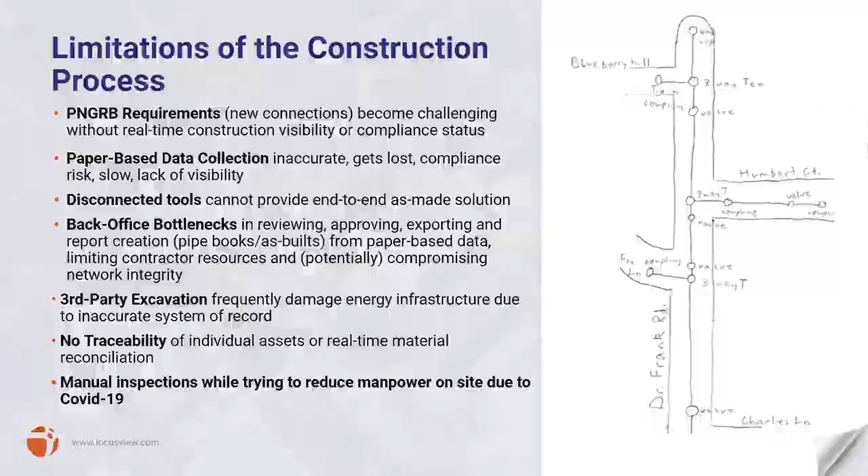The amount of data being collected and captured in the field is huge. You can see how much data we were able to collect on the BPCL project in a few months - it's crazy, talking about tens of thousands of assets and forms. And if you look at COVID and where we are today, we want to limit manpower on site and make sure data is captured automatically in digital format. This is a big driver to use the technology.

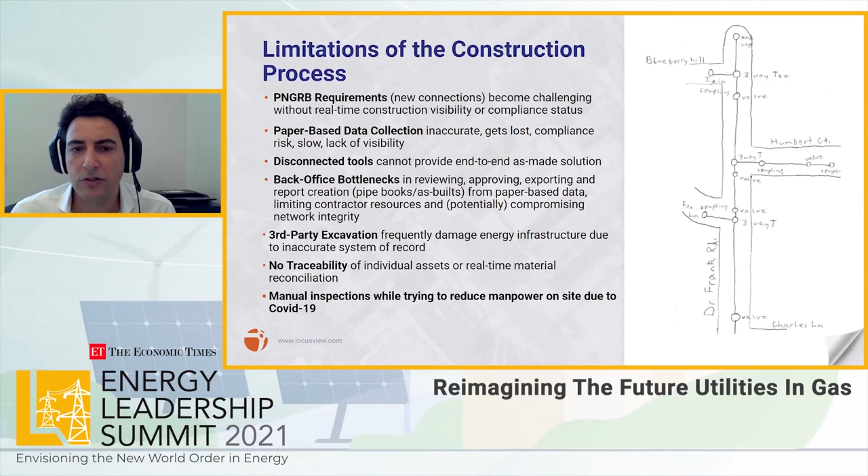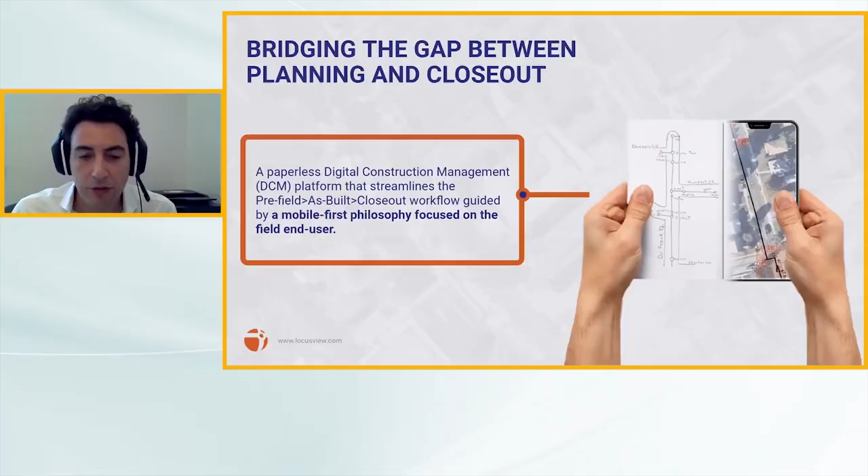So what is Locusview all about? Locusview focuses on construction of linear assets such as gas pipelines, CGD, and electric grids. It's a complete end-to-end digital construction platform that streamlines the entire process, from the pre-field planning phase - bill of material, permits, design, drawings - to actual execution in the field, the as-built, with the ability to collect all data by the field crews themselves during construction without needing third parties like surveyors, and the closeout, generating reports, pipe books, and so on.

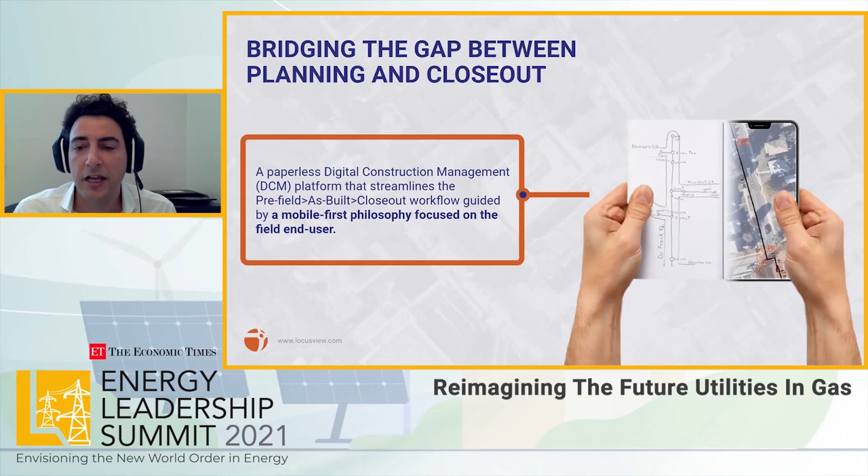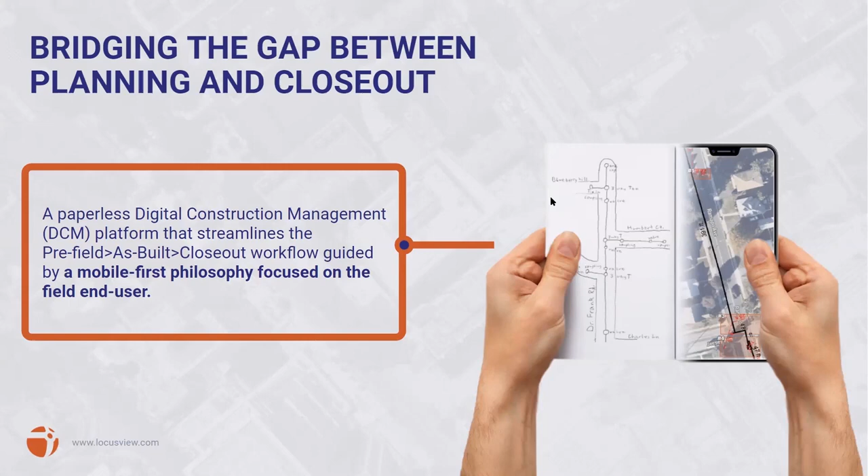The main focus of the technology is on the mobile platform, the field crew themselves, because if the technology is not easy to use, it will be useless. We see many vendors who tried complicated tools designed for back office users and not field crews, and that's why they fail. We are doing everything we can to make the mobile piece as easy as possible so field crews can collect this data on their own after minimal training.

What are the key benefits we're seeing in the market? Based on thousands of field crews using the data, we're seeing a 70% reduction in project cycle time and 20% reduction in rework. The data gets to the office in real time and is validated in real time. If there is missing data, we know about it and can fix it while the trench is still open, when the field crews are still out there.

We're seeing at least 50% reduction in surveying cost, because the field crews themselves can collect survey-level data on their own. Some companies remove the need for third-party surveying services entirely, with the whole process done by the field crews themselves.

And of course, visibility and compliance. Our main goal is to provide real-time construction visibility, giving information about material, joints, welds - everything for traceability - as well as ensuring the process was done according to procedures and regulation. This data is collected all at once, which is why we can create this visibility and validation around data quality.

So how does the system work? We have three main pillars. First is the pre-field phase, where we automatically create an electronic job package. The job package includes the work order, bill of material, existing GIS information, permits, and any data required for the field crew to do their job.

Then we have the field, which is the heart of the system - our mobile platform's main focus. It provides a solution for field crews to collect all data required during construction, including as-built data with high accuracy GPS at sub-foot accuracy, material traceability, personnel qualification, checklist inspections, pressure tests, and so on. This entire data is visible to back office users in real time. If data is missing, we see it in real time, get notifications, and can connect with the contractor to fix it. We have more capabilities being built, which is something we learned a lot about with BPCL.

What is the level of reports and pipe book and so on that you want to have as part of the process? This is something we generate automatically by the system, whether it's the pipe book or dashboard, in order to monitor the progress. Once the project is done and approved, we generate all the reports automatically.

The data will be exported to the GIS system, Esri, Smallworld, and so on. It can also be exported for asset management and other systems.

We believe that in order for a solution like this to be successful, it needs to be a turnkey solution. When something goes wrong in the field, whether it's a software problem, a hardware problem, or a connectivity issue, we want to make sure we have one vendor, one phone call to take in order to get it solved.

This is why we provide this type of turnkey solution, which includes three main elements: hardware, the actual field kit used by the field crews, GPS, ruggedized barcode scanner, tablet, and so on; the software, both mobile and web; and all the managed services, which are actually the glue that connects the hardware and the software in this entire system.

It's the ability to provide high accuracy GPS, network connectivity, RTK, and cloud hosting. We have local service in Mumbai, AWS, so it's all ready to meet the requirements in terms of the location of services and so on. And we have 24/7 local help desk, if there is anything that comes up.

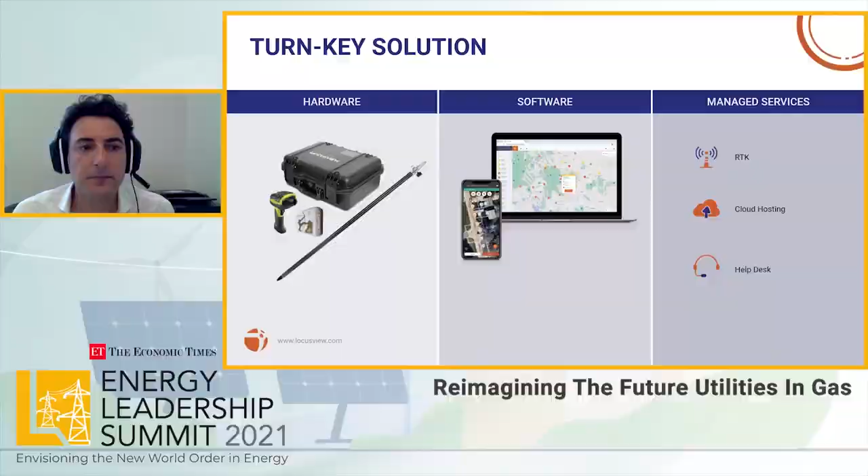Just a few words, and I won't take too much of Mr. Dash's presentation or BPCL's. As I said, we were honored to work with BPCL on this project. We were able to provide them, under lease terms, this entire solution of hardware, software, and managed services. The application was fully customized to meet BPCL's needs.

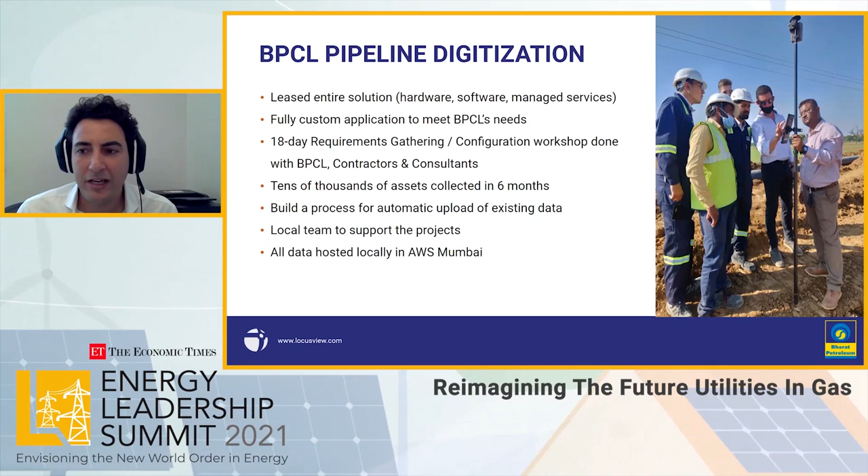As I said, this was the first time we had a production deployment in India, and we worked very closely with BPCL to understand how to fine-tune and customize our application to meet their exact needs. We had a requirement gathering process and workshops with BPCL, their contractors, and their consultants, really bringing everyone we needed around the table, to make sure the application BPCL would get and deploy would meet their exact needs.

We're talking about pretty massive data already collected in the system. Tens of thousands of assets were collected and validated in real time over about a six-month process.

Another thing unique to BPCL: there was a lot of existing data already captured manually in the field prior to Locusview, and we built a specific, unique process for BPCL to be able to upload that existing data too, so that at the end of the day, when they view this entire cross-country pipeline project, they get all the data in one place.

And of course, all the data is available for BPCL and hosted locally in Mumbai. So Mr. Dash, I would like to thank you for your confidence in us. It was an honor to work with you on this project, and I'm looking forward to continuing to work with you. That's it, this concludes my presentation.

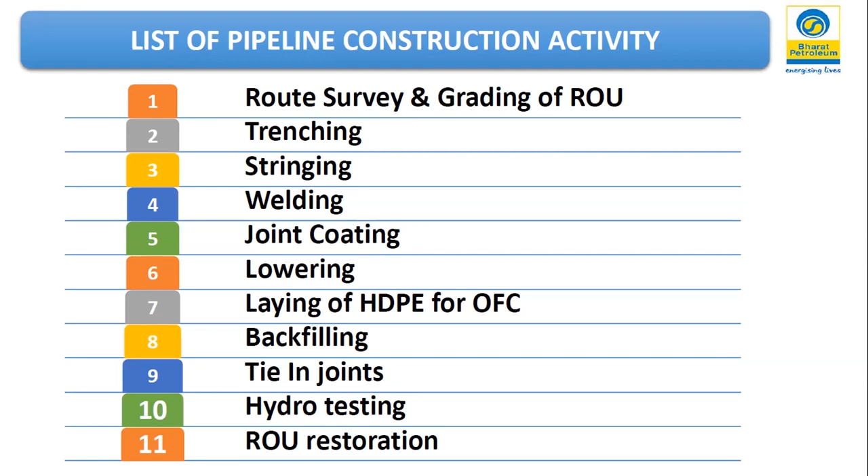After laying the entire pipeline, when all the links and sections are joined, we do hydro testing to check the integrity of the pipeline. Since the pipeline mostly passes through agricultural land taken from villagers or farmers, that land needs to be restored to its original state. This is called ROU restoration, and handing over the land to the land users or villagers. These are the major steps involved in pipeline construction activity.

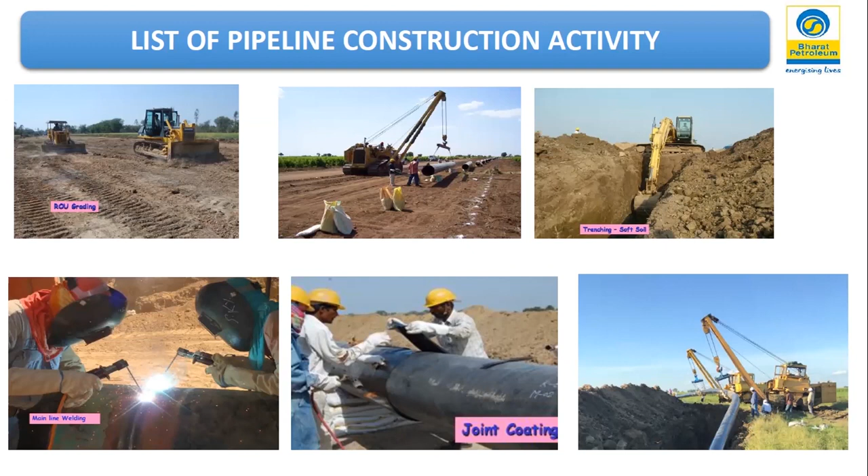These are a few photographs which generally depict the pipeline process - right from ROU grading, then stringing, trenching, pipeline welding, then each welding joint is separately coated, which we call field joint coating. Then the pipeline is buried into the trench, which we call lowering. Now all these processes need to be checked and thoroughly approved by the consultant we engage, and some processes are also cross-checked by our own engineers.

So basically for a project, we generate different reports. When the pipeline is handed over to the pipeline laying contractor, we call it a pipe handover report. Then they string the pipeline, and we generate another report called the stringing report, and trenching report. Once trenching is done, the pipeline welding report is the most important report.

Then each welding joint is coated, which we call a coating report. Then the pipeline is buried into the ground, which we call a lowering report. Finally, a pipe book is made, which gives the summary of all the reports. Currently, all these reports are manual, hardbound, handwritten reports, and they run into volumes.

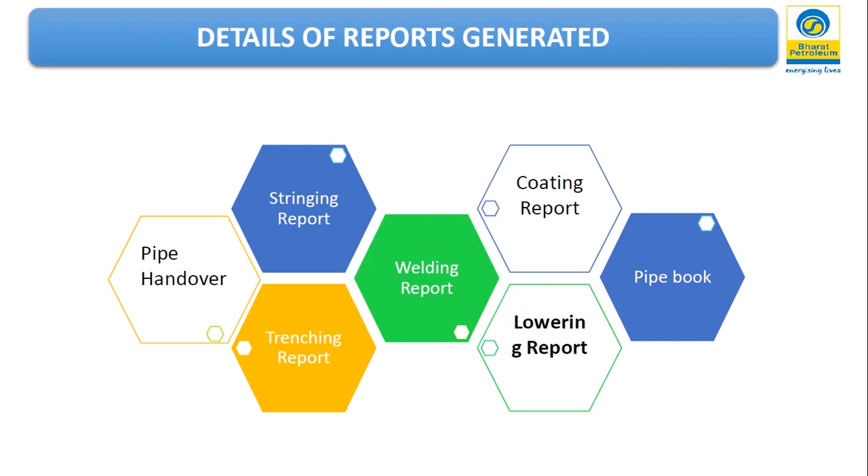Now the technology we wanted from Locusview - we tried to give our expectations of what we want from them. Each pipeline length is 12 meters. We wanted them to give us a format, a platform or an application that would capture at minimum all this data - like the pipe details should be available, giving a pipe number.

Every pipe, which we call an asset, has got a unique number. Then every coating done gets a coating number. Then from which steel heat the pipe is made of, it also contains a number. Then what is the pipeline thickness, and of course what is the grade of the pipeline.

Then comes the stringing and trenching report. We want trench depth, what is the width of the trench, and the length of course.

Then comes the welding report - welding joint number, what is that joint number actually, to trace in future in case we want to carry out some maintenance. Then what is the chainage of that welding joint. Then welding details - which are all the qualified welders who really welded the joint, because one single joint is completed by 6 welders, for the various runs. Then all the welders need to be mapped to each welding joint, showing who carried out the welding.

Then we carry out radiography, an X-ray of the joint, which shows the quality of the weld and its longevity or life. Then comes lowering - what is the chainage, pre and post padding involved. Suppose there is a rocky terrain, we need to go for pre-padding with soft material, and above the pipe also we go for soft padding.

Then there's the pipe cover, which is a mandatory requirement as per the statutory bodies. It is being monitored and later physically checked by the statutory body, which gives clearance for operating the pipe. So it is quite vital.

Then after every kilometer or at every crossing, we do a tie-in joint. The tie-in joint should have the joint number, length, and chainage of the joint, and the welding number, welding joint number, chainage, and welder details, and the radiography result - acceptable, not acceptable, or what defect is in the radiography. All this needs to be elaborated in the report.

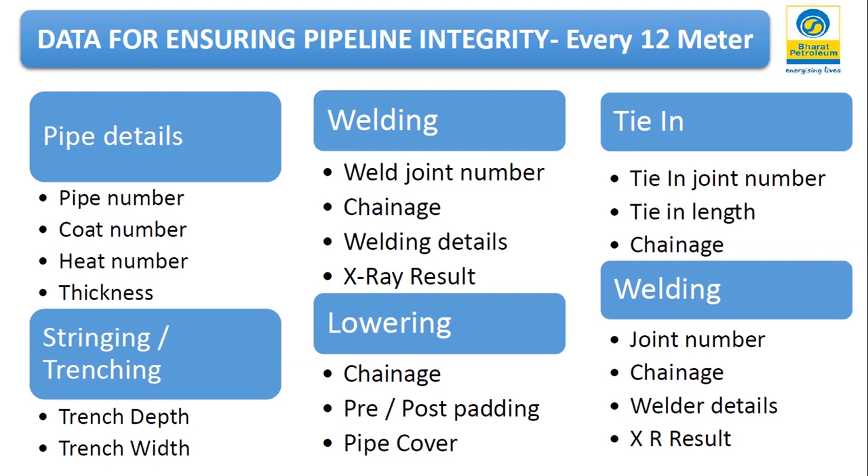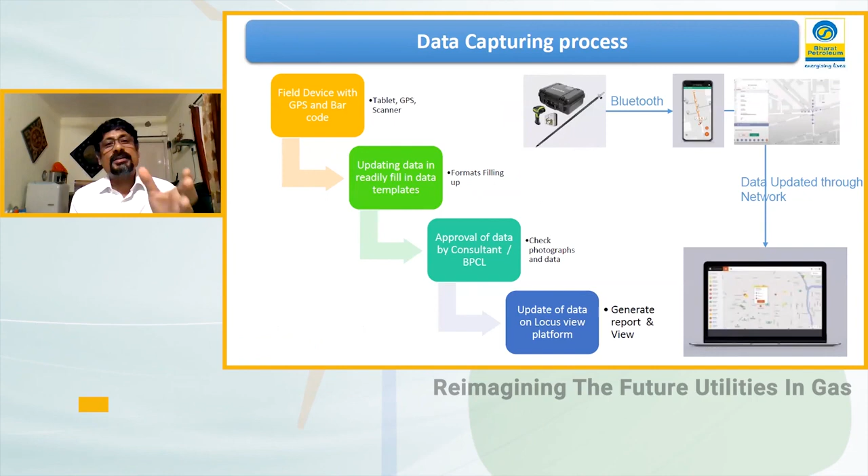And as already explained by Mr. Shahar about the field instrument, which provides us a handheld GPS, a barcode scanner, and a tablet - the solution is capable of collecting all the reports in the field right away.

And each and every report is date and time stamped. You can locate where the report has been prepared, whether in the pipeline, near the pipeline in the field, or in the back office of the contractor or consultant.

That is very vital compared to the previous manual system. We have been observing that the reports are delayed and bunched up. They are not made every day - they get bunched up, and after a week or 3-4 days they start preparing the report. This generally defeats the very purpose of making a report.

Then updating - each report has this benefit, one of the major benefits which I am going to talk about in my next slide. It captures the GPS coordinate of each and every weld joint, each and every pipe.

Then for this data, they have prepared a pre-filled format in which you only have to give the minimum data that needs to be filled up. This is done very easily, and all the pipeline laying contractors are trained in this and able to complete this data with minimum effort.

And this data, after completion, goes for approval by the consultant or by BPCL. Once the data is approved, there's also a provision to attach a photograph of that location showing what is happening there, along with the report.

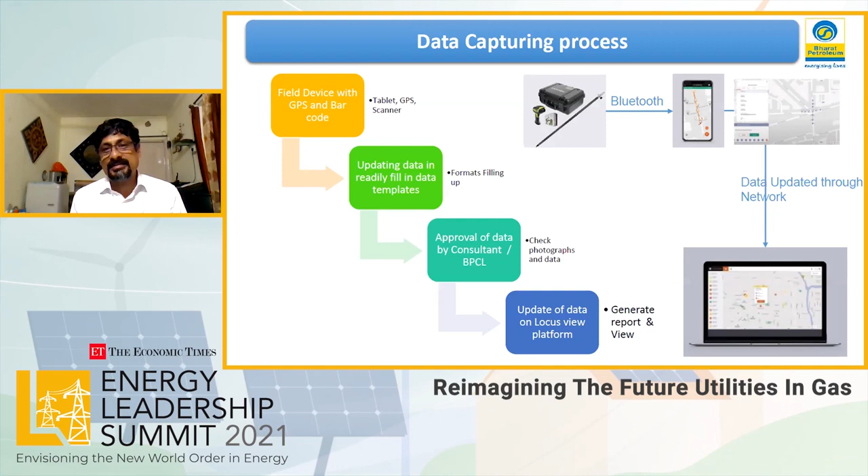So finally, once the data is approved, it gets uploaded to the server and populated, and the person sitting at the back office can see what is happening in the field. This is, in a nutshell, the basic process involved in this data collection.

Now coming to the benefits - the difference between the earlier manual process and the current digital process. In the manual process, for each and every report, all the pipe numbers, heat numbers, and coating numbers had to be written repeatedly, which consumed a lot of time.

In the current scenario, this data is pre-filled only. And since we have a barcode scanner, by scanning the pipe which has a barcode, this data gets automatically transferred to the server or to the tablet. This is really accurate - if somebody enters data manually, there's a likely chance of mistakes happening, but this captured data is errorless.

Then, GPS coordinates used to be entered manually - somebody had to go with the DGPS to note the coordinate, northing and easting, and note it down. Doing this manually, wrong data may get captured.

Now, with the high accuracy GPS, the coordinates are transferred seamlessly to the tablet. That is a major benefit and advantage, because locating an asset more accurately at a later date while carrying out maintenance is very important. This is a very valid advantage available in this software.

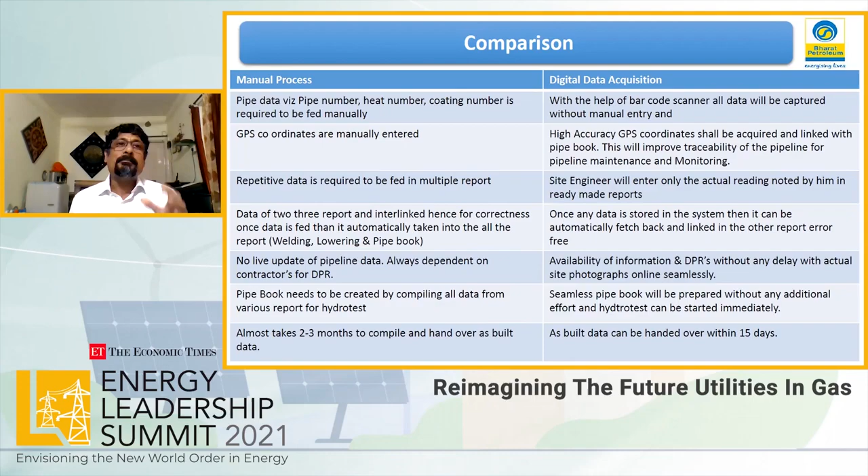Now the most important thing happens after completion of the project. Once the project is complete, compiling all the data and closing out the project is troublesome and really painful in the manual system. In this new system, once we say all the reports are approved and correct, the entire data is ready within 15 days. In a manual system, this took around 2 to 3 months; now it is ready within 15 days. That is substantial time saving, and the project closeout happens very fast.

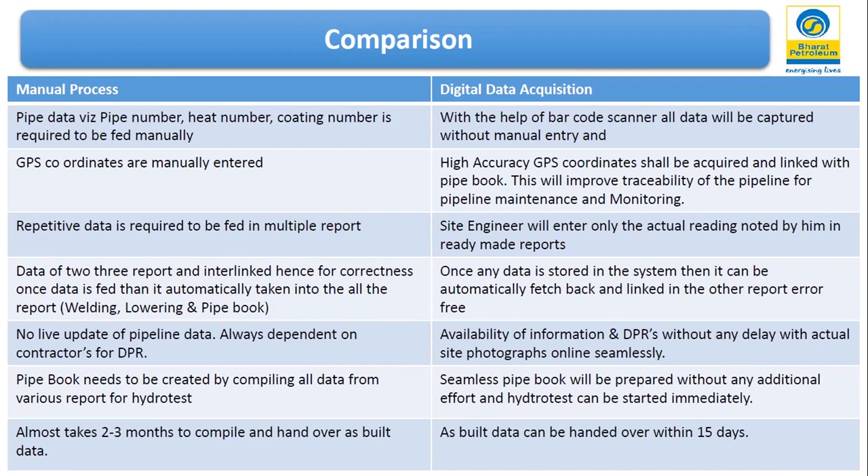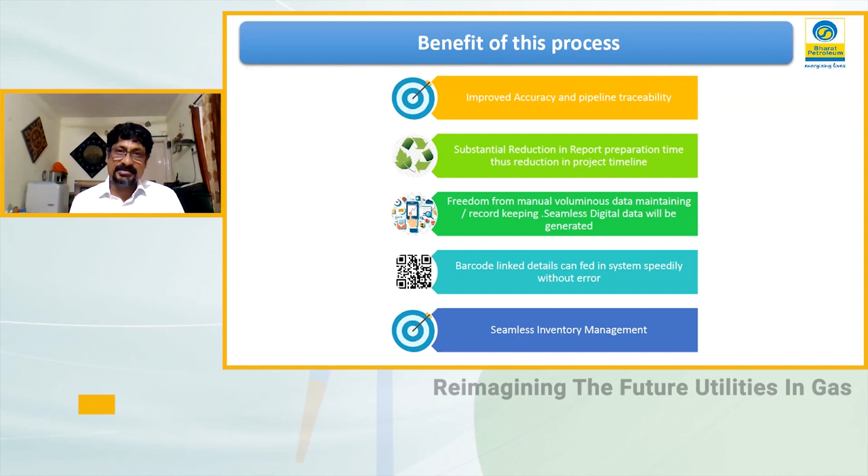Now the benefits already spoken of: improved accuracy and pipeline traceability. Earlier, if a pipe was cut into two different measurements, we were unaware of where the leftover piece was lying and who was accountable for it. Now each and every pipe is traceable and accurate, and the location of the pipe is accurate.

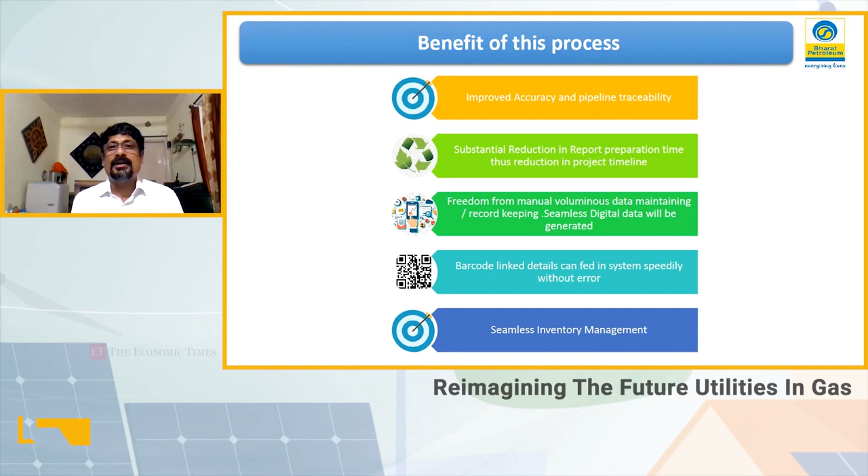The second major benefit: the manual system takes a lot of time for report preparation and converting those reports into pipe book format. Now, unless the pipe book up to lowering, up to coating level, trenching, and coating level is ready, no pipeline lowering activity will happen. This is the bible as far as pipeline work is concerned. So unless your pipe book is ready, further activity is hindered. In the current system, we know when the pipeline will be lowered just by looking at the system, which is a substantial reduction in project timeline.

Second important point: freedom from maintaining manual, voluminous data. Once you've collected so much manual data, maintaining and keeping it is troublesome because it occupies space, and future tracing requires finding data from hard copies, which is really problematic.

So digital data, since it is available and finally captured, gets transferred to our server through our ArcGIS system, making finding data really seamless. Since barcoding is there, all details of pipe data are available. Just by scanning, you get the data into the system seamlessly.

Then there's seamless inventory management, because you know where all your assets are lying. This gives us real-time visibility, and we can easily manage the inventory lying in the open field and under the custody of the contractor.

Looking at the tablet or rover provided for data entry, the system is equipped with battery backup also, so there's no hassle if the battery goes down, since pipeline work happens at remote places. Work starts at 7 o'clock in the morning and continues up to 7 o'clock in the evening, a 12-hour working day. All field equipment has to be there for continuous data entry. It may happen that there's a shortage of battery power in the system, so they have provided additional battery backup which sustains this type of work.

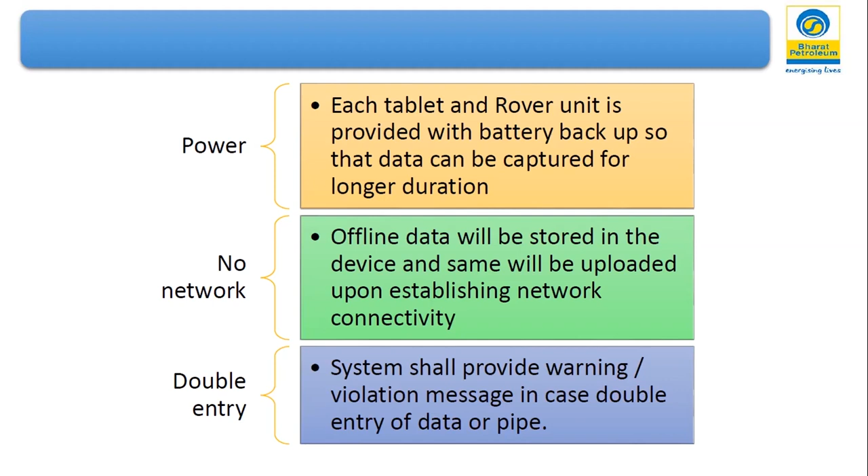With this system, we can also monitor the welder's performance. It tells us which welder is performing well, what is the percentage of error, or percentage of repair happening due to faulty welding. That also gives us online data, which currently for the manual system is dependent on the contractor. Now it is available seamlessly online in the system.

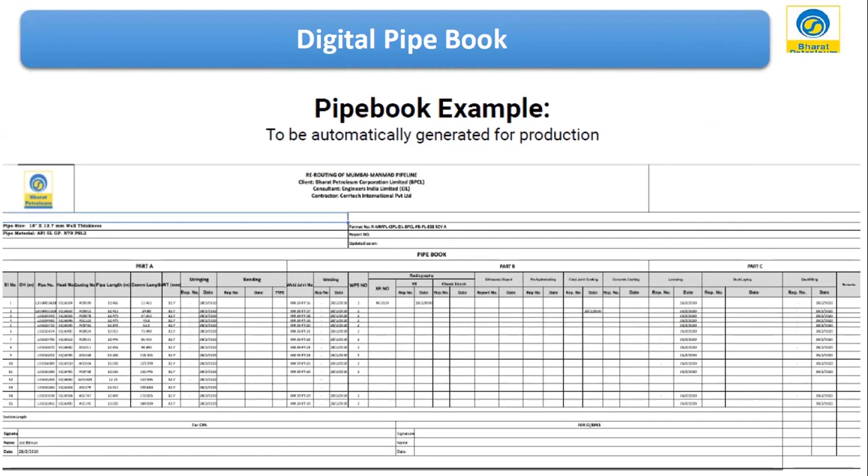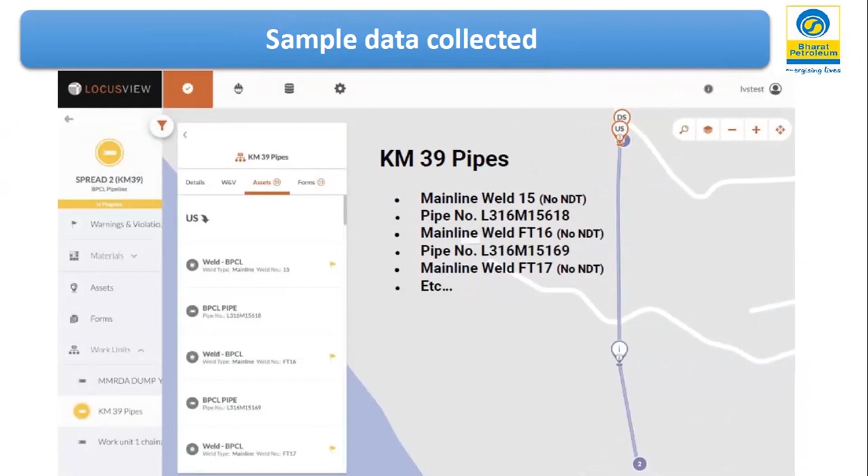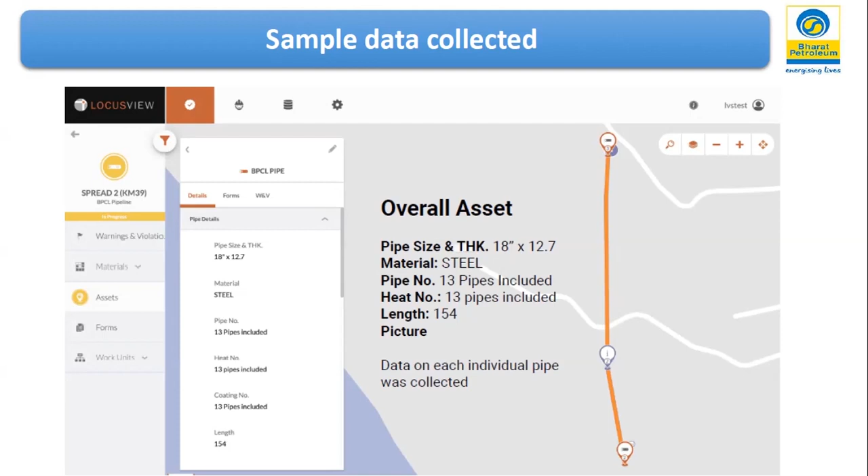Screenshot of the software which we are currently using for the Bina Panki pipeline. It gives us the weld pipe number, pipe joint number, weld number, which is the welder, and all the basic data is available by click of a mouse. It also gives the overall asset detail—thickness of the pipeline, pipeline size, material, how many pipelines are there in this stretch, how many assets, and what is the length of this section—everything. At a click of a mouse, the person can see and monitor the entire construction process.

Now, coming to the way forward—this is what we have been doing. During the process of implementing this software, we have seen a capability that it can also give us a solution for the operation and maintenance stage. What we actually do after commissioning of the pipeline is cathodically protect it to save it from corrosion.

So in that case, we have to take a pipe-to-soil potential reading—that is, how much current is drawing. From the current, the health of the pipeline is monitored. So every kilometer, or at every pipeline crossing, we have installed test lead points where a person goes and checks with a multimeter what the reading is.

Currently this data is monitored by some of our contractors. Every month they collect it and manually give us a report. But we are not sure whether all the PSP readings are actually taken in the field or whether some of the data is manipulated. So we have to come out of that situation to know how things are progressing as per our requirement. This data can similarly be digitized by giving a tablet to the person.

Once he captures the data, it will be date and time stamped, and the person sitting at the back office can know that at this time, at this coordinate, this data has been collected. So we are sure of the data coming to us. Again, the data will be available in the software, in the server, and from the back office we'll be able to know—there's no need for the person to come with a manual report and transfer the data to an Excel file and give it to us. So again, we are not dependent on the contractor in this process.